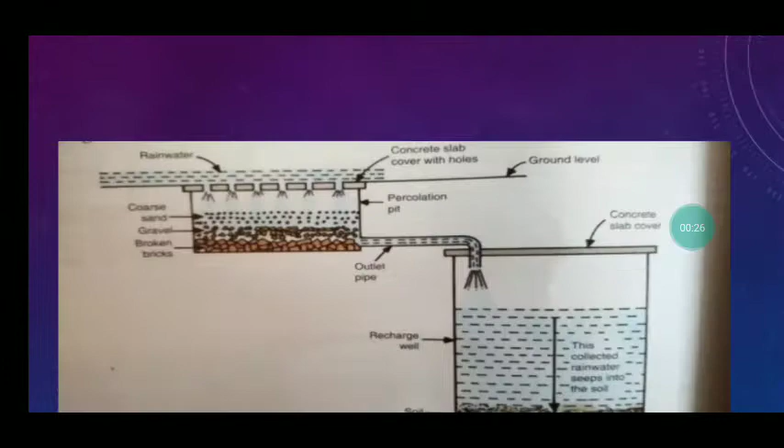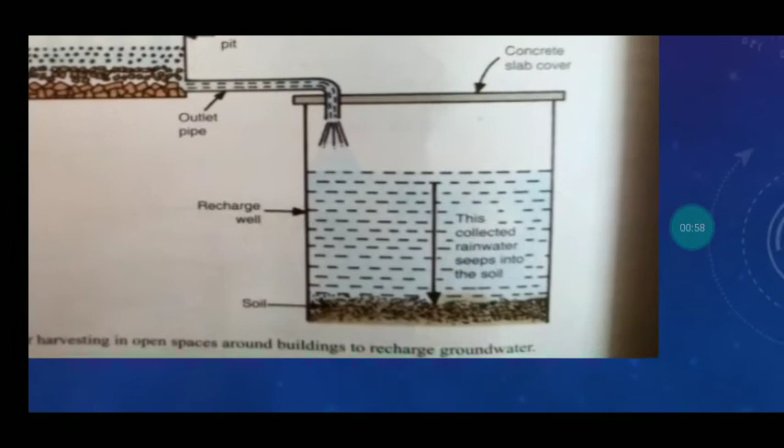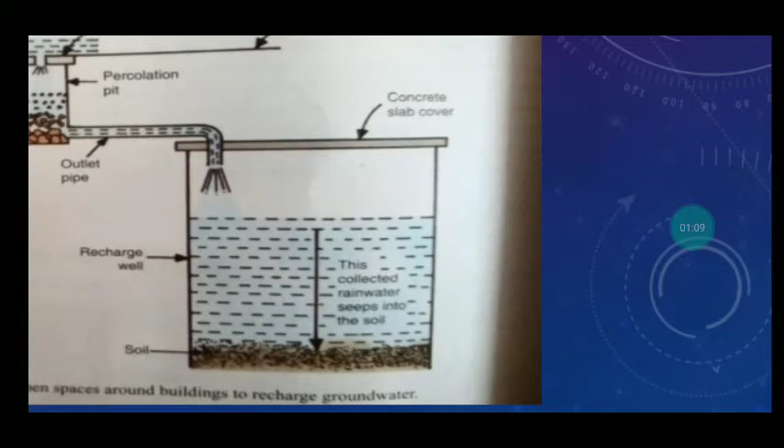So here you can see in this picture, when the rainwater is coming from the atmosphere, we put a percolation pit, which is a concrete slab covered with holes, and that percolation pit contains gravel, sand, and broken bricks. When the muddy rainwater comes under it, the mud gets stuck in the broken bricks and gravel, and the fresh water comes out from the outlet pipe, which is stored in the well, called the recharge well. So again the rainwater comes under the soil, which helps to balance the water.

So let's discuss how it's made, what is the structure of this rainwater harvesting system. The rainwater harvesting from the open space around the building in a city is done by constructing a percolation pit covered with a concrete slab having holes in it, and connected to a recharge well through a pipe.

The recharge well is about 1 meter in diameter and 3 meters deep. The rainwater falling in the open space around the building goes into the percolation pit through the holes in its concrete slab. So the recharge well has a diameter of 1 meter, and its depth, or we can say height, is almost around 3 meters.

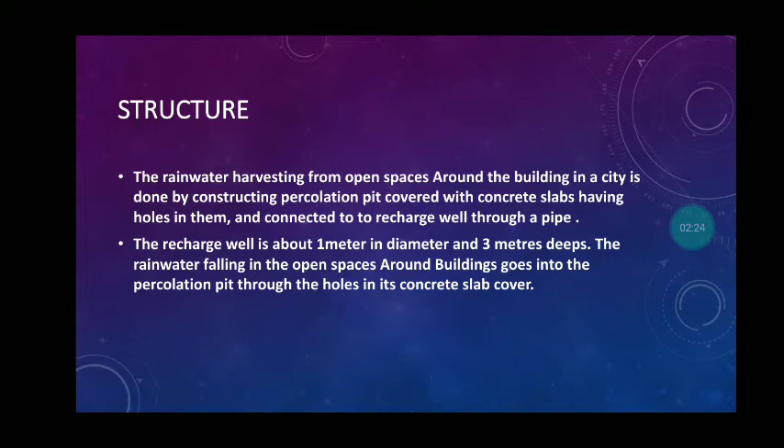So when the rainwater comes under the ground, or comes under the percolation pit, which is a concrete slab covered with small holes through which the water comes in, after filtration in the percolation pit, the rainwater enters the recharge well through the outlet pipe and gradually seeps into the soil.

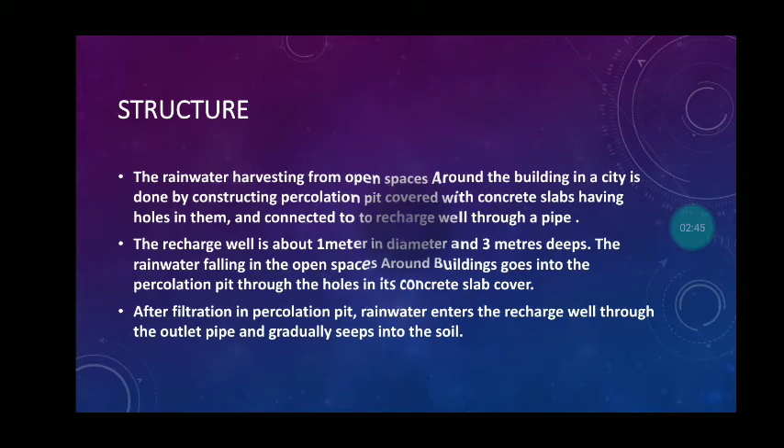Purpose: what is the purpose of rainwater harvesting? The main purpose of rainwater harvesting is not to hold the rainwater on the surface of the earth, but to make rainwater percolate under the ground more efficiently, so as to recharge the groundwater and balance the water.

The next point about rainwater harvesting is that it increases the availability of groundwater and helps in overcoming water shortage.